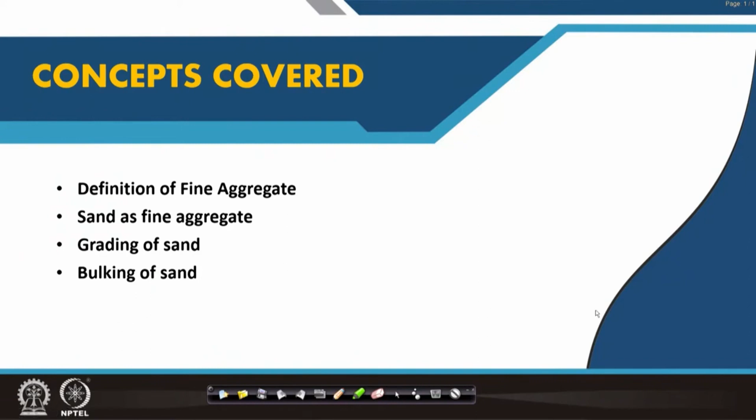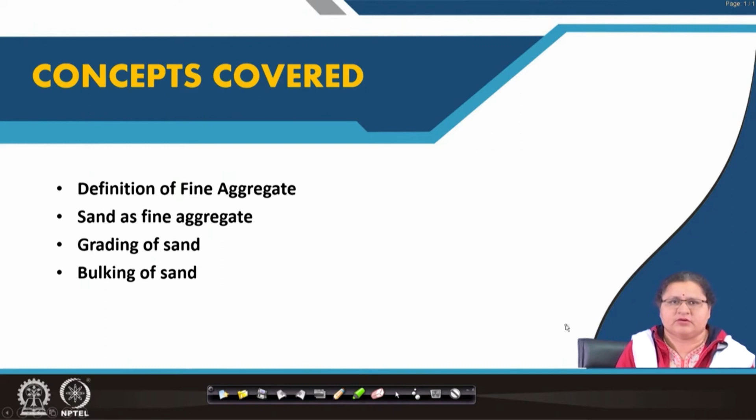Today we are going to discuss lecture 2 of module 4, on fine aggregates. In the beginning lecture of this module, we discussed how concrete is made, a mixture of fine aggregate, coarse aggregate, cement and water. Fine aggregate mostly refers to sand. We will go through the definition of fine aggregate and why sand, sand as a fine aggregate, and the grading and bulking of sand. With these four topics, we will try to cover the purpose of this particular ingredient in concrete.

If we see any naturally occurring material with a dimension of the order of 4.75 millimeter and below, mostly below that, we will term them as fine aggregate. But we must remember that anything below that may even refer to clay or very fine soil particles. If we consider those as fine aggregate, we will end up in a lot of problems. So fineness, the fine particle size, should be restricted to 0.0625 millimeter, and beyond that it should be discarded from the sand.

Now, sand is one fine aggregate. As you can see in the picture, you can even touch sand and feel that it is granular, and the granules are fine, which is why the term fine aggregate comes. But is it only sand?

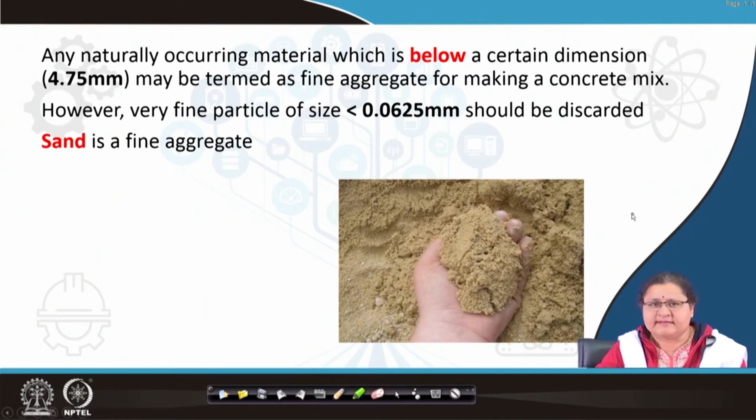Sand is mostly used, but others include cinder, which is a residue obtained from the furnace, or granulated slag coming from industry, or even quarry dust coming from stone quarries. Sand is not always available at all points, so alternatives exist, mostly having very small dimension granules.

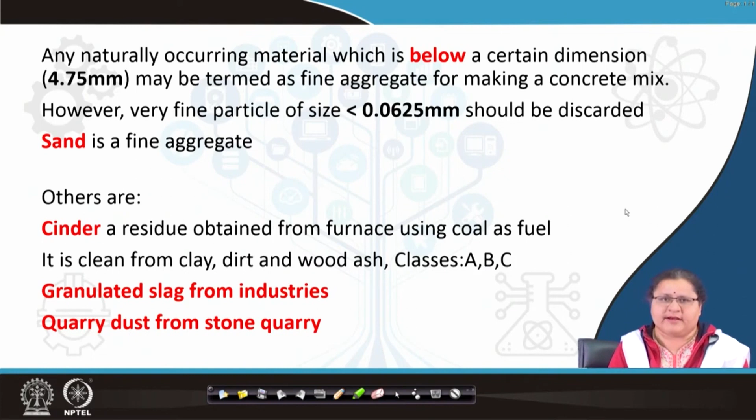Usually it is sand, which is SiO2, referring to naturally occurring finely divided rock. It is obtained mostly from river beds and is free from salt. We all know seashores have lots of sand, but that contains a high amount of salt, so it is not appropriate for use.

So what does sand actually do in a concrete mix? It brings economy to the mix by reducing the use of cement. We had seen previously that if you have a container of coarse aggregate, bigger granules, and put water in it, the water will be consumed. But if you have sand and the granules together, the amount of liquid going into it will be lesser, so obviously it brings economy to the entire mix.

It will also prevent issues because coarse aggregate particles are larger in size while the cement-water slurry is very fine. This intermediate layer of sand helps prevent shrinkage and the development of cracks in the structure. In combination with cement, it adds strength against crushing and also allows air to enter the construction, helping in air hardening, so the air can penetrate inside and help the process of reactions.

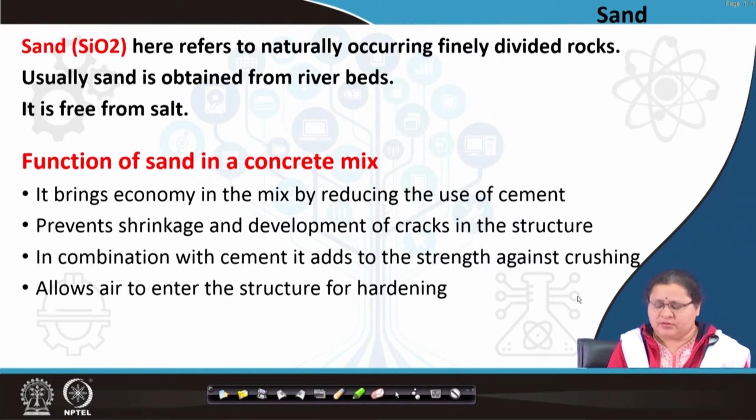If we move further, if you touch sand, you will understand the grain size. Sand is not always the same in feel, some may be coarse, some may not be so coarse. So you need to know how to grade sand, and why, because it affects the workability of concrete.

In a concrete mix, adding sand helps in mixing easier. Workability is how you need to work with it, and very poor, very fine grade sand makes a poor mix.

What it does is coat the cement particle and does not allow the cement to get associated with the larger aggregate. So if this is the coarse aggregate and this is the cement particle, the fine sand actually coats it, becoming clay-like. It coats the cement particles and stops adherence of the cement particle with the coarse aggregate, so the binding becomes difficult.

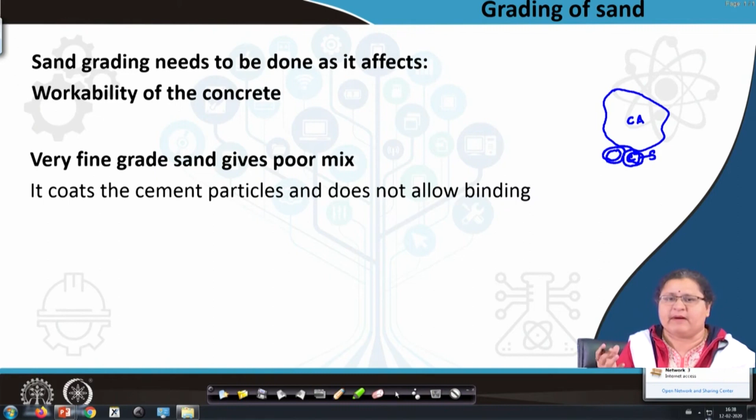Similarly, we have coarse grade sand at the other end. It gives a very harsh mix and leaves voids. As mentioned, in the compaction process you try to get rid of voids, but if coarse particles of sand are used, it may lead to voids remaining. So the best option is medium grade sand for construction purposes.

Now, is it possible, from a very large heap of sand, to find out which one is of what type?

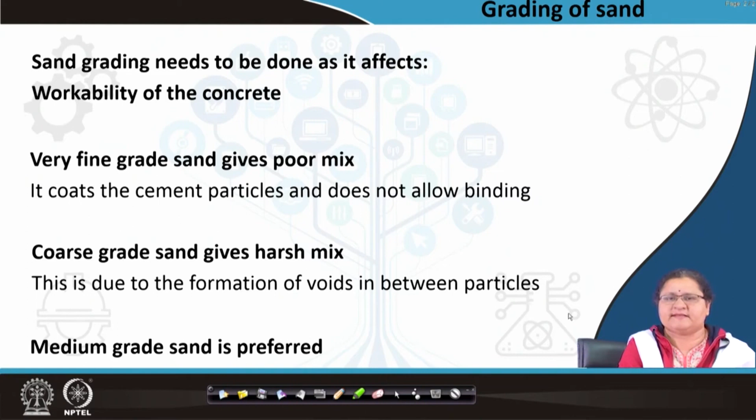Which sand is of what type? It is very difficult to tell. Yes, maybe a very trained person can touch and feel and say this is good, this is okay for construction. But there should be some technical method to find that out.

So we have a sieve test which helps us calculate the fineness modulus of sand. It is not possible the way we learned with brick, to find out whether it is a first class brick or a second class brick.

Here, for fineness modulus of sand, what is to be done? You cannot separate out individual granules and go for testing, you cannot go and measure each and every particle. We can take help of a sieve.

Sieves are of different dimensions. You must have seen a sieve. Whenever you are pouring tea, the tea leaves remain and the tea goes out through the sieve. Even when you sift flour, you keep the husk and larger parts up, and flour of the desired size goes below. You must have seen this at the domestic level.

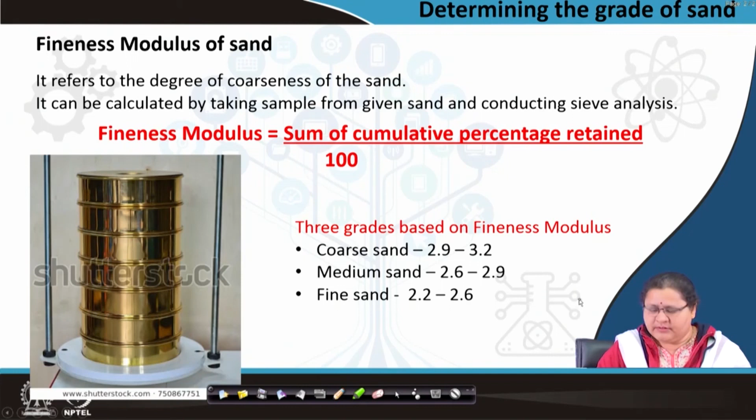So let us move to this sieve analysis in detail, which I tried to explain. The overall gradation by distribution of particle size, expressed as a percentage of the total dry weight, is the objective. Gradation is determined by passing the material through a series of sieves stacked with progressively smaller openings from top to bottom. Hope you understood this from the previous picture.

Weighing the sand retained in individual sieves and finding the percentage retained is the next step. Finally, the cumulative percentage is worked out for the sand retained in each sieve. The sum of the cumulative percentage retained in each sieve, divided by 100, gives the fineness modulus.

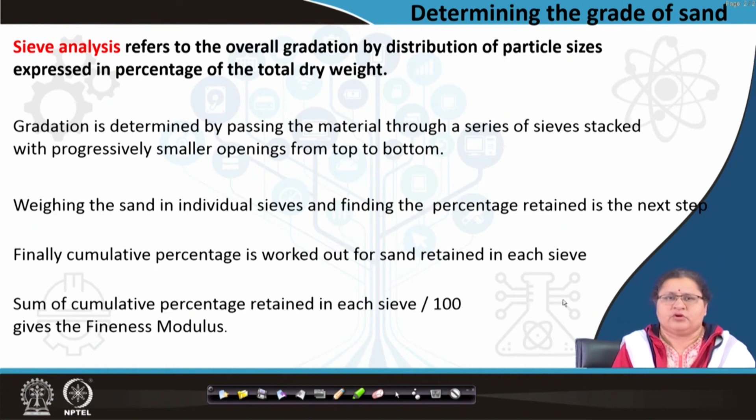I think a demonstration through an example will make it clear. Say you are given 1 kilogram of a sample, that is 1000 grams, and here you see sieve numbers 1 to 6, starting from 4.75 to 0.15 millimeter, and here is the weight of sand retained after shaking the sieves. So you have allowed that 1 kg of sand to separate out into all these trays of different dimensions.

You see all the sand has passed the 4.75 millimeter sieve. 100 grams are retained by the 2.36 millimeter sieve, 250 grams are retained by the next layer, 350 grams are retained by the layer next to that, 200 grams are retained by the 0.3 millimeter sieve, and 100 grams are retained in the last sieve, and that completes your 1000 grams.

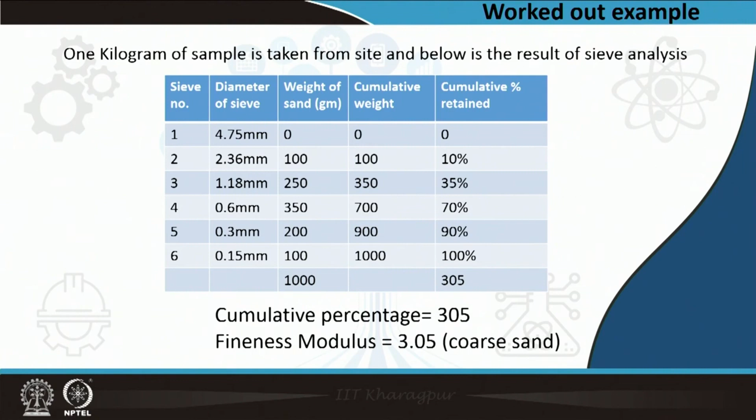After knowing this, we move to the important phenomenon called bulking of sand. If you remember, in the previous lecture when discussing batching, we said one is volume batching, one is weight batching, and in many domestic level works we go by volume batching because that is easier and more convenient. You have a measuring unit and use 2 times, 1 time, 3 times, whatever the mix is, using that as the unit.

And yes, one bag of cement always comes dry and it is 50 kg. You call it by weight or by volume, that is fine. But if you are doing construction during the rainy season or a very humid part of the year, your sand behaves differently.

You will see that the volume of sand will increase. That is called bulking of sand, and it happens due to the presence of moisture and because of the very small fine sand particles. As you see in this picture, water is actually coating the sand particles, and it is not breaking; it is pushing the particles away from one other, giving an effective increase in volume.

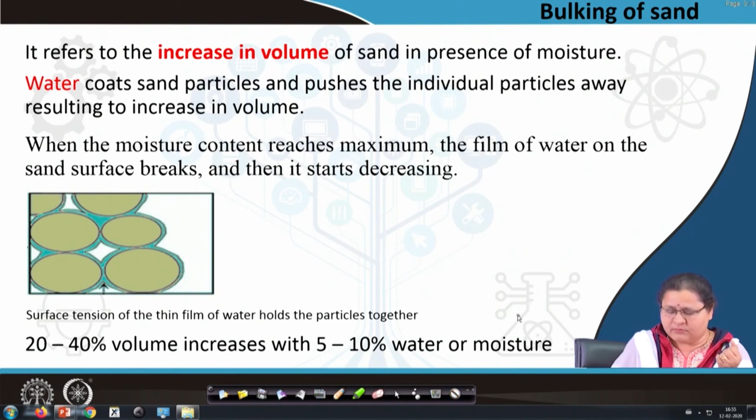How can you measure this? What happens if more water is coming, more moisture the sand is facing, this water coating breaks and the sand reaches saturation, then the water gradually comes out.

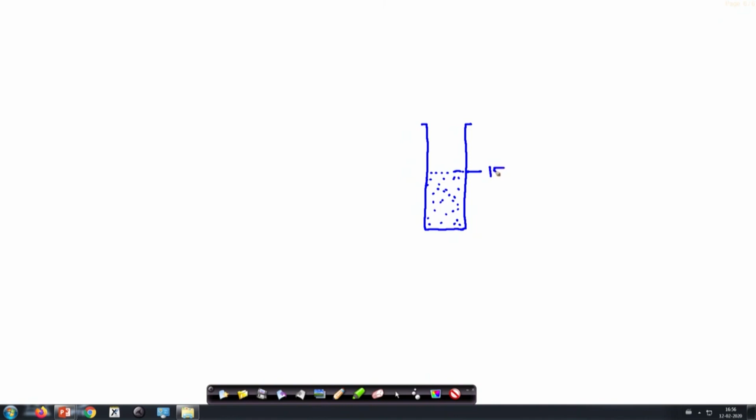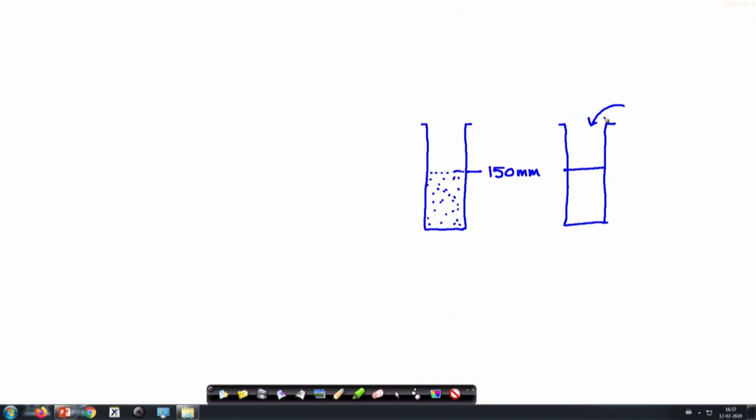So, if you have a beaker and you put bulked sand up to a level, say this is 150 millimeter measure, and in the same sand you now add or pour water from the top. This was bulked sand.

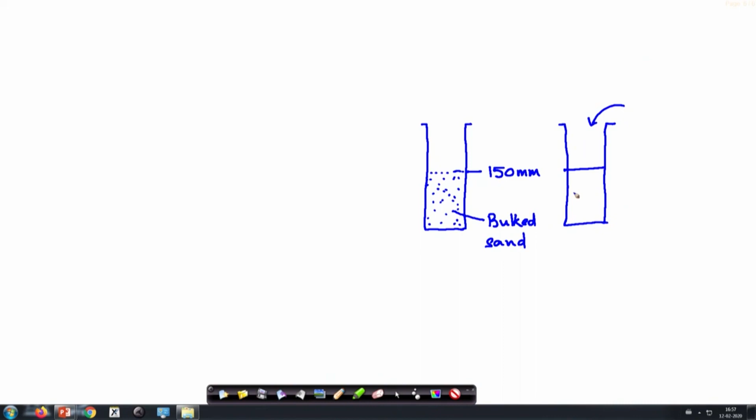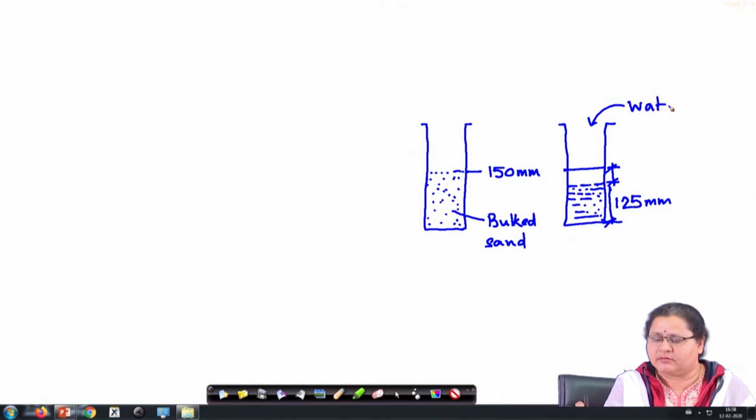Now you are pouring water, the bulked sand gets saturated with the water and it separates out. This part is water, and say only this part is the sand, say this is 125 millimeter. So what is happening here? This was bulked sand which was having 150 millimeter. Now, it has been saturated with adding some water. You have got the sand separated out, showing 125 millimeter.

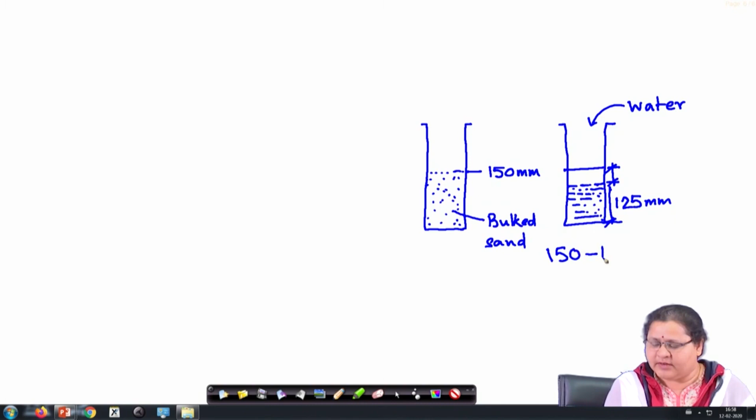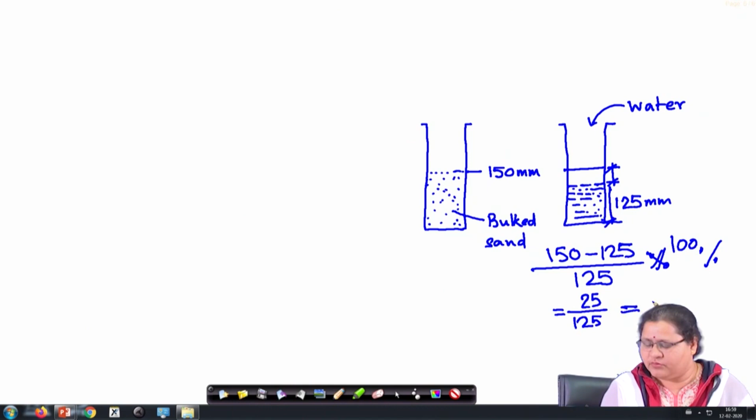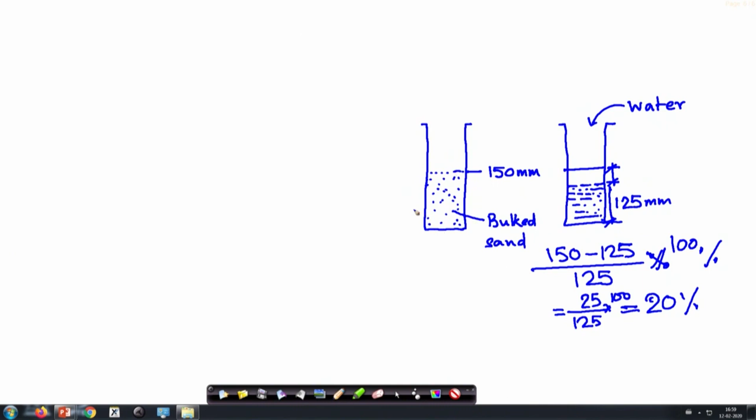So, 150 minus 125, divided by 125, that is the actual volume, is the percentage of increase, which is equal to 25 by 125 into 100. This is the percentage of increase. So this is equal to, into 100, equal to 20% increase. Here you are neglecting the area because they are the same. So you are getting some 20% increase, and this is how you can measure. So if you would have used this sand, you would have used 20% less sand in the mix.

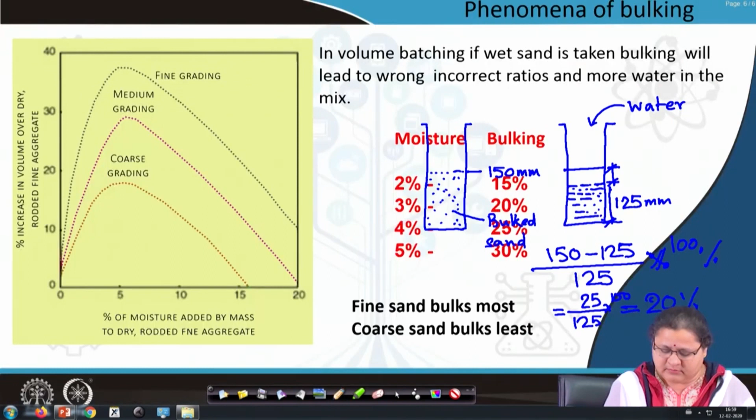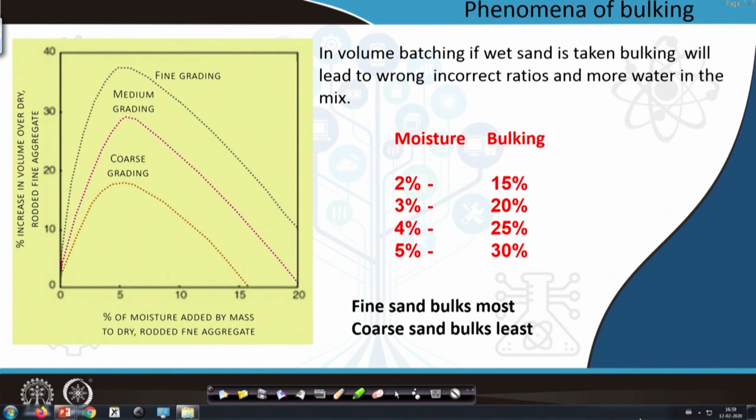This graph shows fine sand having the maximum bulking, coarse sand having the minimum bulking, but in all three cases it is quite huge. So if we keep these points in mind, you will understand that yes, sand, by the name it is sand, but it has lots of tasks in a concrete mix.

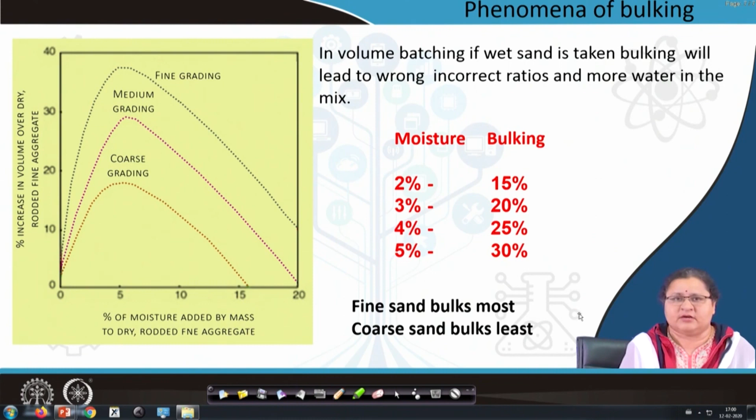So, we can conclude saying that sand is the mostly used fine aggregate, though we also use other items as fine aggregates. Particle size is important as they give strength. Particle size is important as very fine sand also coats cement and does not allow cement in the binding process. Fineness modulus can be worked out, and medium grade sand is preferred for construction work. Yes, coarse grain and fine grain sand have their particular uses.

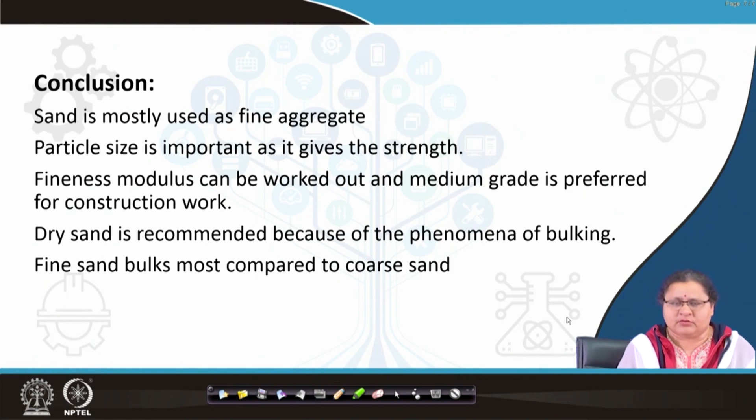Dry sand is recommended because of the phenomenon of bulking. It may not always be possible to get 100% dry sand, but if you keep the point of bulking in mind, then some additional portion of sand may be increased proportionately. Fine sand bulks more than coarse sand. However, bulking is a huge process, it is in quite a good percentage. So we just cannot ignore the process of bulking.

Once said all these points, I think we are in a position to move to the next item, that is coarse aggregate, which we will try to cover in the next lecture, and we will always have to keep in mind that we are targeting to achieve a good mix for the concrete, which we will use now and then in our building industry. So this is a very challenging material, and with these few words I end here. Thank you.